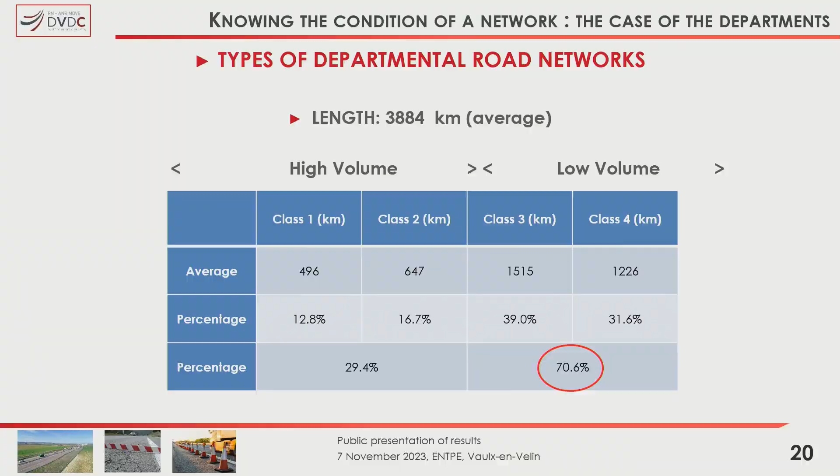On the typologies, on the 26 answers, we realized that departments have about 4,000 kilometers of road networks, which are broken down in 4 categories. 1 and 2 are the structural routes, the main roads, which represent about 30% of the network, and 3 and 4 are local service roads, which are about 70% of the network.

In their maintenance policies, they all have a road database, and the policy is not always the result of defined processes. Works are scheduled usually on a 3-year basis, and it is not always codified.

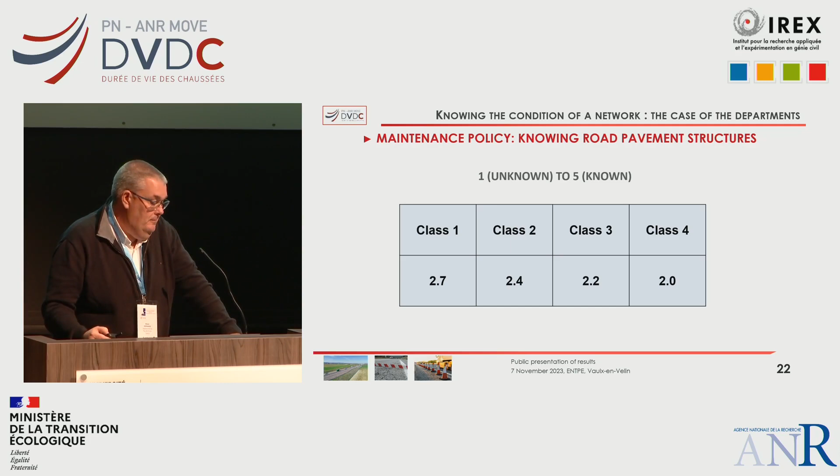On our knowledge of the structures, we don't know our structures, out of 5. We see that the departments don't know their road pavement structures. There's a caveat here: in class 1 and 2, we have 2.7, 2.4. We know about half the structures. For 3 and 4, we're about 2.2, so it's a small average.

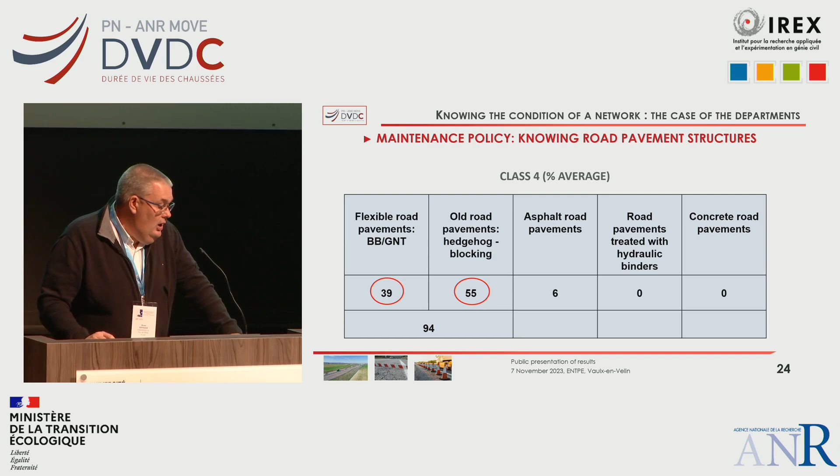For class 1, in average percentages, we have about 80% of our roads which are in thick asphalt or in hydraulic materials. However, on class 4, the smaller network, we have 94% with supple, flexible pavements, which will have treated or untreated broken stone with hydraulic binders.

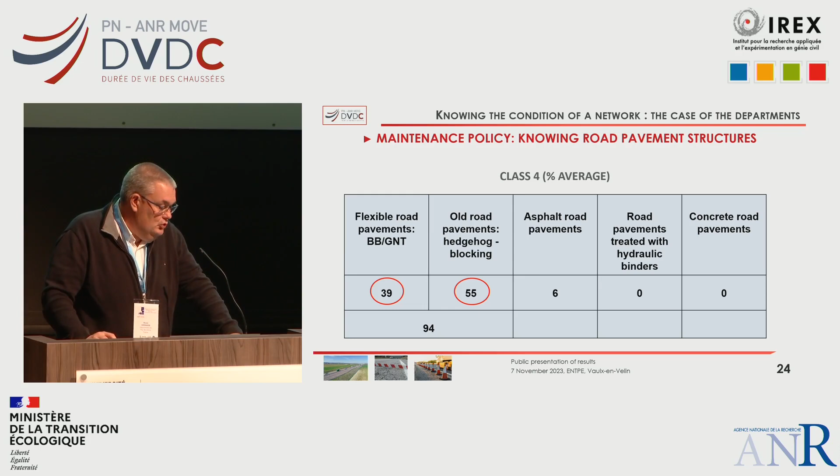Now, the pathologies that we see here in class 1, the main networks: we'll have rutting of the wearing course, tearing, peeling, slipperiness. These will appear between 10 to 14 years after, and are often due to traffic or age. Then cracking at the top of the bituminous mixes, transverse cracking, joint treatment, and bleeding. This appears after 3 to 8 years, and that's mainly due to the climate and thermal variations.

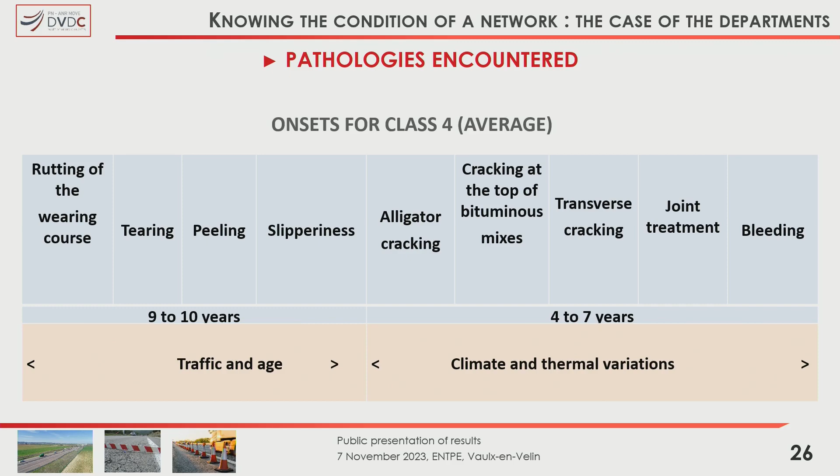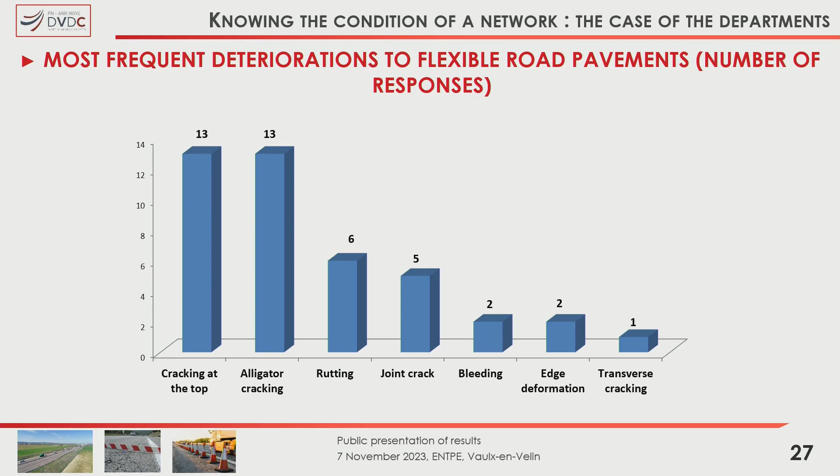So the deterioration that we see most often in these flexible roadways: we have cracking at the top, alligator cracking, rutting, joint cracking, a bit of bleeding, edge deformation, and transversal cracking.

For resurfacing or reinforcement, we asked what was advised. If we have a classic BB/GNT, we see the renewal of the roadways on the main categories is about 4.5%, let's say 5% on average, a renewal every 20 to 22 years.

However, in class 3, we have very low rates of renewal, 1.6, 1.1, 1.5 on average, which means we have resurfacing between 63 to 95 years, which is a very long period of time, and we know nothing that can resist that long.

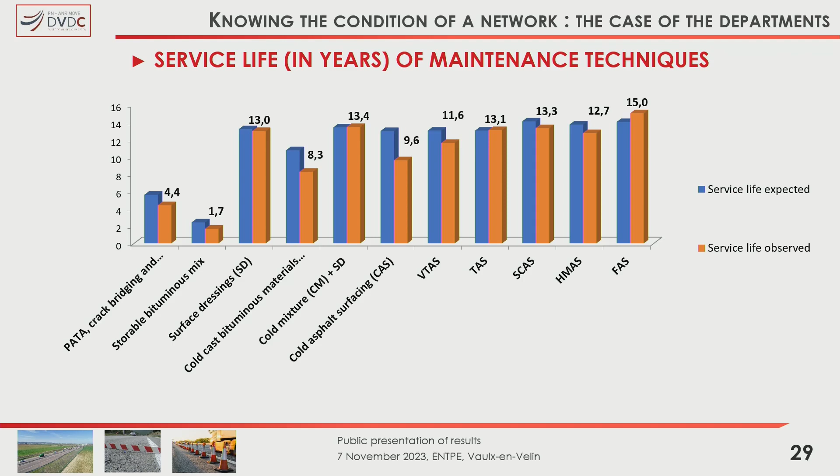For cold storable bituminous mix, we fill some holes, and we have a very low life cycle of one year, maybe a little more.

And then we have preparations that are done during the warmer seasons. We see that each technique has about the life cycle that's expected. We take different techniques. For surface dressings, we're looking at 13 years of life cycle. For the cold cast bituminous materials, that's where we have the greatest gap, where we hope for 10 years, and we're at, on average, around 8 years.

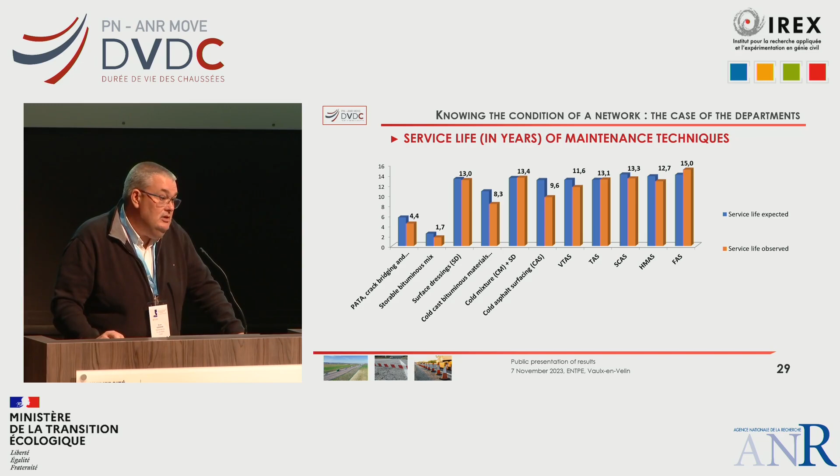For cold mixture, for superficial wear, we're in 13 years, which we saw previously. For the cold mixture, we have a small gap, which can be explained that there's very little cold mixture today, less than 5% in France, and so not necessarily with good feedback or good practices. And there'll be a new national project for cold mixtures where we'll explain how to use this material compared to hot mixtures. There's many more specificities. You have to be careful when you put these down.

And so I think in a few years we'll correct some of the faults with an increase of these practices. For BBUM and BBTM, VTAS and TAS, we're looking at about 10 years. BBSG, BBME, we're looking at 13, 14 years. And the good surprise is that for the special tars, or asphalts, we have an estimated amount that is lower than the real life cycle of these materials.

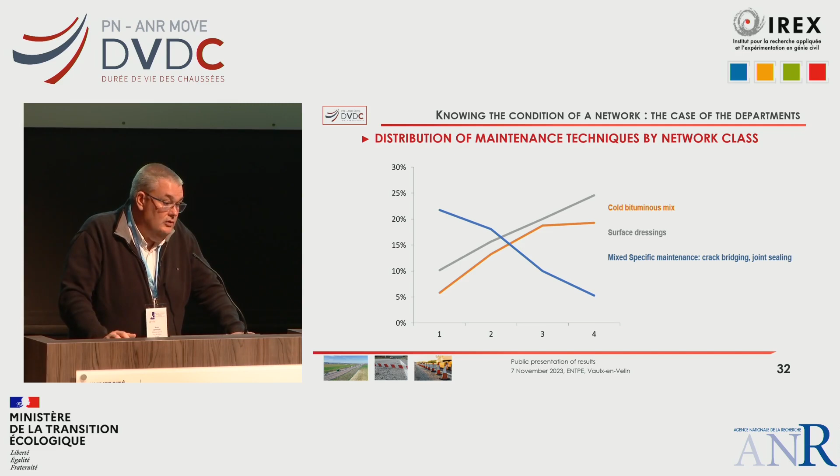So if we look at the techniques of maintenance, we see we use very little cold coverings, more on surfaces on categories 3 and 4. For superficial, we do it on the 3-4, often to have a BBSG type to put an MDG or have an additive to the asphalt to avoid water leaks, and then cold surface dressings, mixed specific maintenance. Crack bridging we have more in 1 and 2 because we have more of hot coverings on the more important roads.

In the complementary study, we asked the departments the number of roundabouts they had, and on average we have about 228 per department, which means one roundabout every 18 kilometers. That's outside urban areas, and these roundabouts are 70% thick bituminous surfaces, 10% semi-rigid, often cement-based structures, and then we have flexible coverings, and 6% which are mixed.

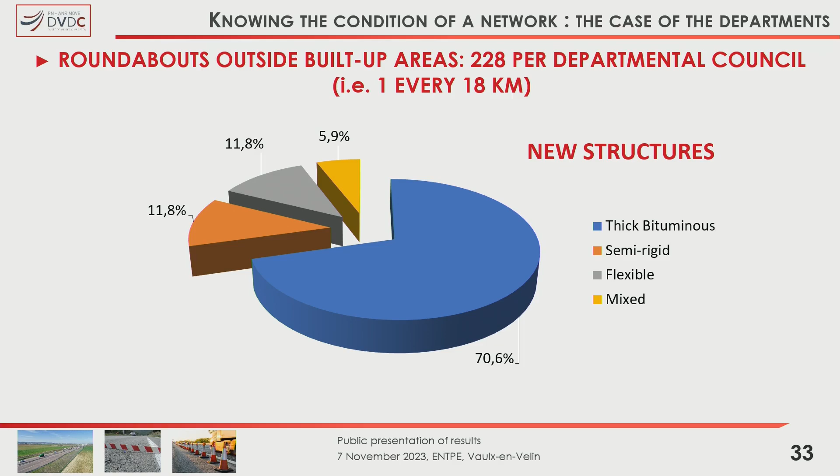So here we did the same thing. We looked at the deterioration by the amount of appearances. We see that usually it's a separation of the longitudinal and transversal joints. We have cracking at the top, and then we have fatigue cracking. Then we have surface glazing and or rutting, alligator cracking, and the cracking of cement-treated base courses.

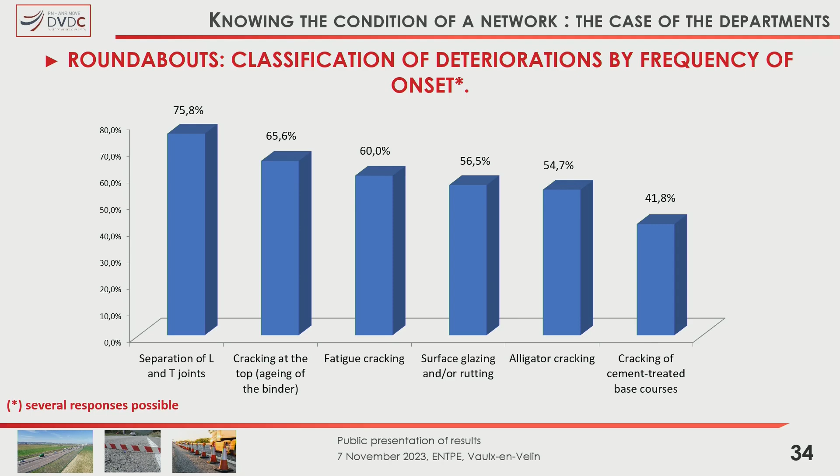The conclusion of the study, therefore, we had a better knowledge of the typologies of the networks and the roadworks and the policies we have on our routes. The network typologies, we see that each technique is different, and it depends on the category of the network, the identification and quantification according to network class and type of pavement structure. There were pathologies that we encountered, the periods of onset, the mechanisms of onset, and aggravating factors, and the service life of road pavement structures or techniques.

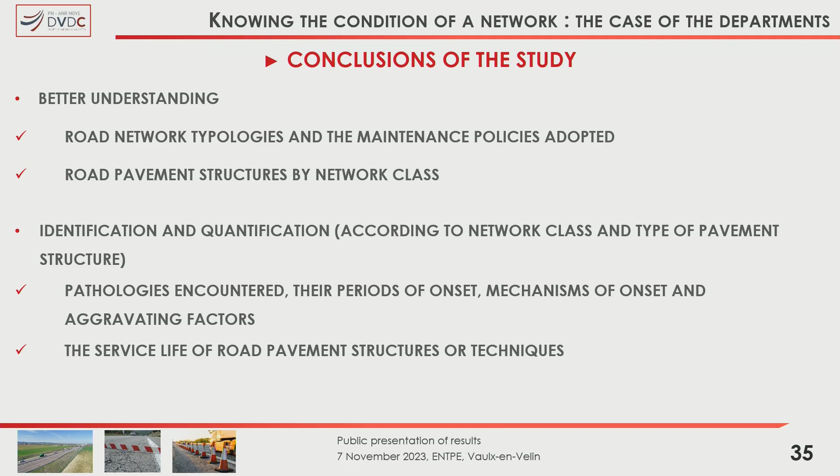So the conclusion of the study is the comparison of the expected and actual service lives. We see more or less what we expect. The behavior and service life of roundabouts outside urban areas or built-up areas, and also what came out in the 26 departments, is that if they have a mountainous road network, which is above 800 meters, they would like to create a community to be able to exchange on specific deteriorations because of the specific climatic conditions.